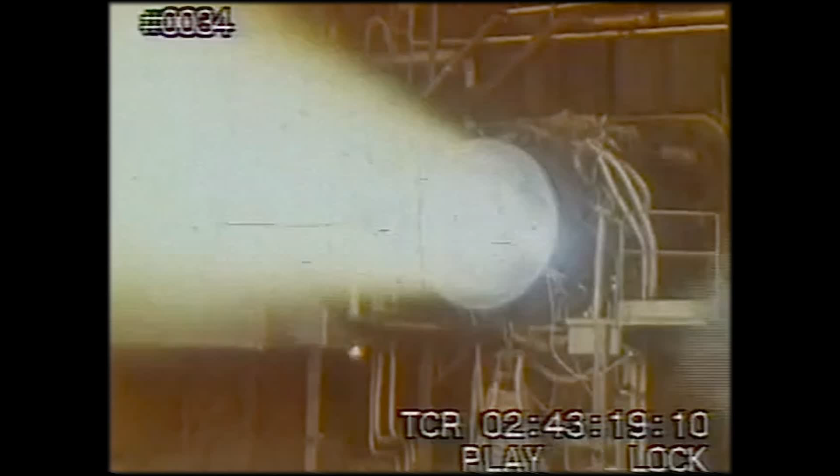Got rocket engines, you've got money. So get yourself on down to your nearest ex-Soviet state while stocks last. RD-170s, NK-33s, we know how to build them and you don't. We've got warehouses of these things, but better be quick, the Americans are snapping them up as we speak.

Want to hire our engineers to design your own engine? We can do that too. Better hurry before Iran get hold of them.

Or maybe you're a country of taste. We've got hydrogen LOX engines just for you. The Brits are eyeing those up for their spaceplane, which they're totally going to build.

Forget engines, how about an entire Buran orbiter? We already have some rich guy in Australia buying one, and we can make it happen for you too.

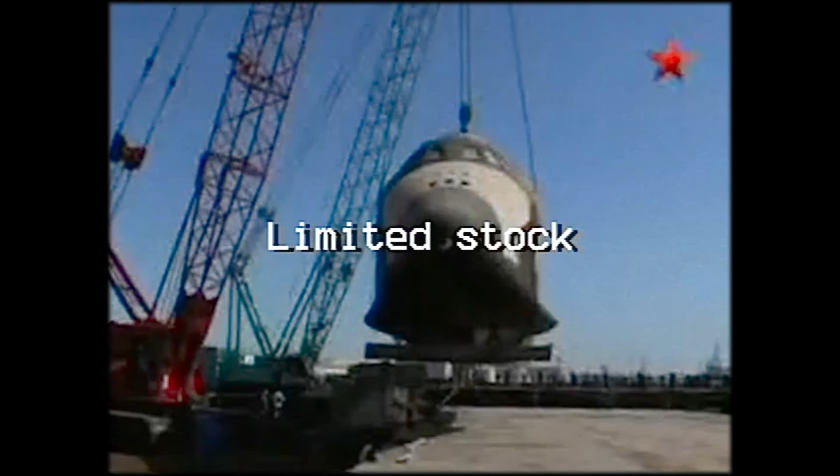Suitcase nukes? No, we don't sell those. I mean, they don't exist. Probably. Or a trip to Mir.

Not ambitious enough? These Americans are already lining up to buy Mir. If you don't want to go there, why not bring it to your doorstep?

We've already sold one engineering mock-up to Tommy Bartlett's Exploratory in Wisconsin. Okay, and we can sell one to you too.

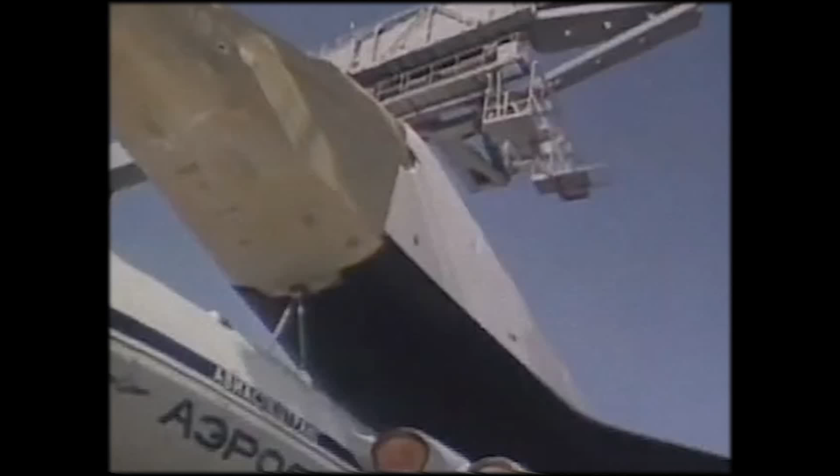The Europeans are eyeing up our VMT Atlant for their spaceplane, which they are totally going to build. Hell, have two of them. You buy one, you get one free.

Please buy them, we really need the money. If we can't sell it, we'll rent it to you. Want to rent Baikonur? Be our guest. You can borrow a Soyuz or a Proton while you're there.

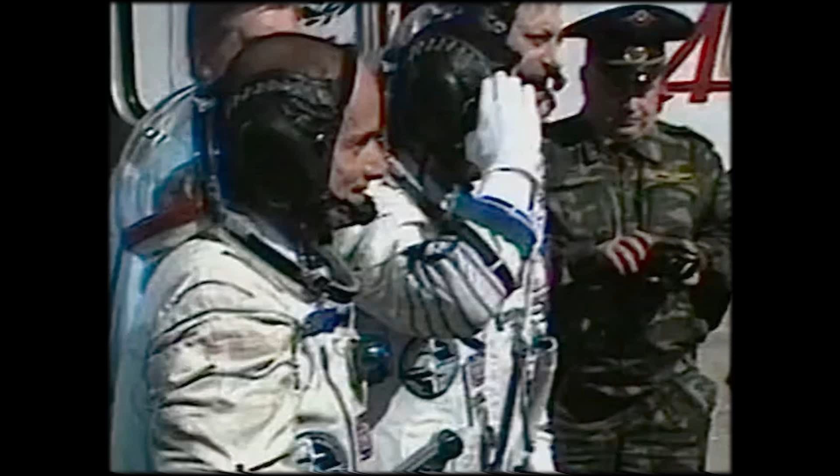Want to use it to be the first space tourist? Be our guests. We're already renting out our nuclear icebreakers to tourists. We can sure as hell take you to space too.

Need to lift and shift something big? Well, this girl is for hire!

Some people on the internet got something slightly wrong, so I've made an hour-long video about it.

Back in 2020, a test firing of a SpaceX Raptor engine exceeded 300 bar of chamber pressure, which may have been a record at the time. It's difficult to know for sure. Chamber pressure isn't really something that was scrutinised in the public eye until quite recently.

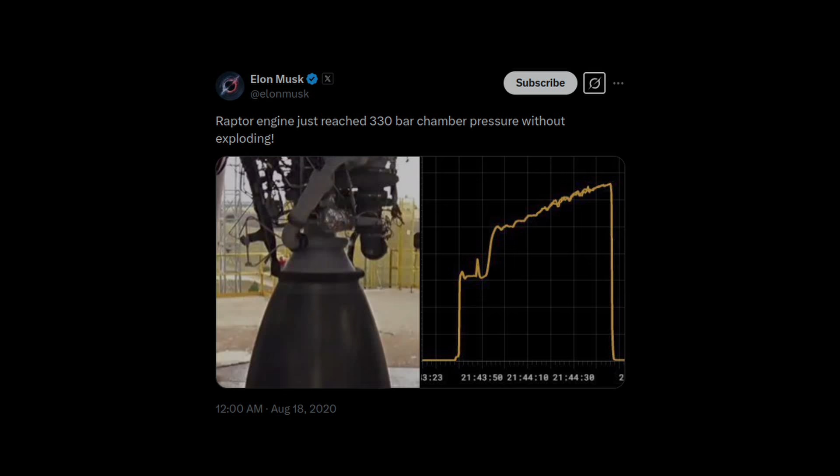Quite a few news sources stated the previous record was held by a mythical and absolutely revolutionary engine, the late Soviet RD-701. Even Wikipedia still states that to this day. Problem is, on further reading, it's clear without a shadow of doubt that the RD-701 never existed.

The first rule of my channel is to make videos about things that are interesting. I also have a kind of hidden rule to only evaluate things that were actually built. But the RD-701 is interesting enough for me to break the second rule. So this video will be a little different to normal.

I will be discussing multiple things that were built that were closely related to the RD-701. And I will discuss how the RD-701 would have worked and why it would have been really difficult to actually use in an orbital spacecraft.

I will try and let you come to your own conclusions on whether it could have given the world a cheaper, safer, and more practical space shuttle. For that, we need a lot of context. This video is a story.

If you're here to just learn about how a sequential tripropellant engine works, just skip to the relevant chapter.

Now, I want to be clear. Nothing here is a criticism of anyone who mentioned the RD-701 in a video or an article or anything else. It took me a while to realise it was never actually built, and it was only when I translated some journal papers originally written in Russian that I figured it out. It's just not possible to expect anyone mentioning it in passing as part of a greater video to have gone through all the research I did for this one.

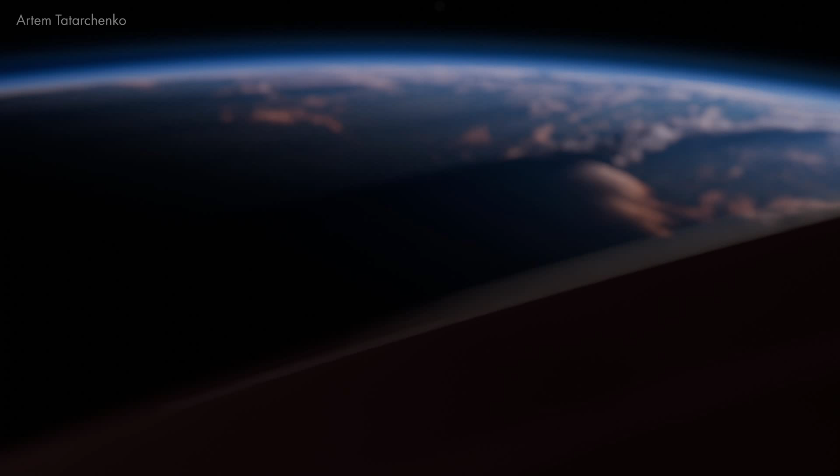Finally, this story does tie into modern-day Russia, particularly the destruction of a prominent related piece of equipment in the ongoing conflict in Ukraine. I don't want to discuss that again. I've made my feelings on that unambiguously clear before. If you really want to hear it, skip to this point in the linked video.

Whoa! The Soviets designed a tripropellant rocket. It must have been fueled by antimatter and cyanide or something, right? Well, not really. The RD-701 was designed to run on liquid hydrogen, kerosene, and liquid oxygen.

For those who've seen the video I made about a year ago about a very different tripropellant engine, that's going to be a real disappointment. While that engine was a nightmare to operate from a chemical hazard perspective, the RD-701 would have been a nightmare from a mechanical and materials engineering perspective.

To understand how it was to work, we first need to revisit an old concept: specific impulse. Shortened to ISP, specific impulse is one of the most important defining parameters for a rocket engine. It has a particularly interesting property, which is if you try and explain it on the internet, you'll always get angry comments telling you you've got something wrong. There's a reason for that. I'll get to it at the end of this chapter, and hopefully I'll make everyone angry.

For a given propellant choice, specific impulse can be characterized using one measurement alone: the velocity of the exhaust. Imagine two equivalent rockets. Both eject the same mass through the nozzle, but rocket A ejects it at a higher rearward velocity than rocket B. Rocket A will travel faster. Rocket A has a higher specific impulse.

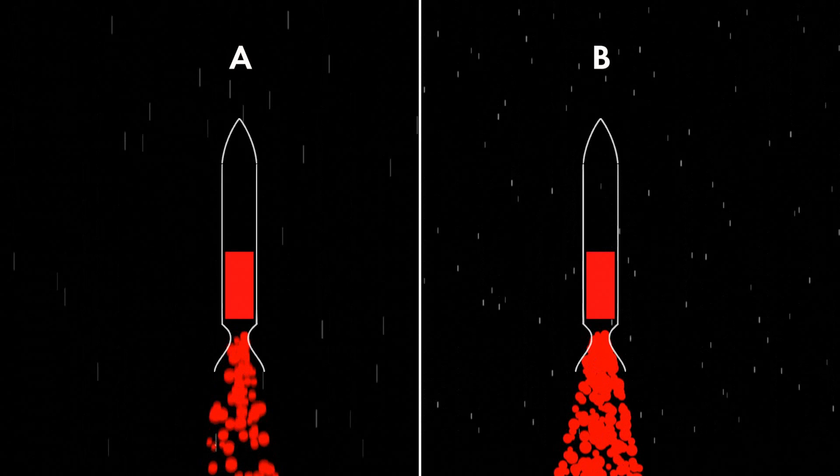Okay, how can we make the exhaust speed higher? The most obvious approach is to use lower density propellants. If the exhaust gases have a lower molecular mass, they'll be accelerated to a higher speed, pushing the rocket forward with a higher thrust. At the extreme low density end are propellants that incorporate hydrogen. Hydrogen and liquid oxygen is the practical example and the propellant of choice for systems where a high ISP is a necessity. We can actually do slightly better than this, but beyond this point are spoilers from our previous tripropellant rocket video.

If you don't want to have that horror concoction revealed here, just skip forward 1 minute. Okay, so that engine used mainly hydrogen, but accelerated it by burning lithium and fluorine at extremely high temperatures to increase the exhaust speed even more. Crucially, those are all elements with low atomic masses, giving a low-density exhaust and delivering a record-high ISP.

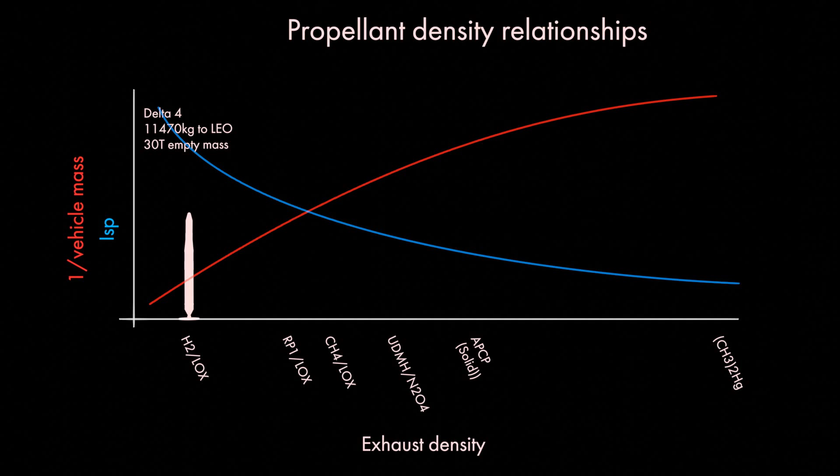We have a trade-off. And that is why the Delta Medium and its brother the Delta IV Heavy are the only rockets ever built that can get to orbit using only hydrogen and oxygen. Ever wonder why a Delta IV Medium can carry less than half the payload to low Earth orbit, yet is larger than a Falcon 9? That's why. Of course, this isn't a criticism of the Delta IV, it was a workhorse. But in most cases, using hydrogen-based propellants alone to get to orbit is not practical.

So a smaller rocket is a lighter rocket. Let's revisit the other end of that scale. That tripropellant I mentioned in the previous video is probably not the most chemically horrifying rocket engine ever built. It's definitely not the most horrifying one ever conceived.

That honour probably goes to the dimethyl mercury rocket proposal. If you didn't immediately recoil in horror, a tank of dimethyl mercury would be enough to fatally poison every person in North America just by coming into contact with it. That was never built. But back in the 1960s, US researchers did inject mercury into a combustion chamber, giving us the most dense propellant ever used in practice, and presumably creating an environmental disaster in the process.

So finally, we see why kerosene and methane are so common as rocket fuels. They're trade-offs between rocket mass and specific impulse. But for those willing to put in the extra effort, it is possible to have the best of both worlds.

Using a higher density propellant for the larger first stage allows us to build something that isn't absolutely huge, but still has the high thrust needed to get off Earth without building giant heavy engines. The second stage of a rocket is smaller, so it's easier to build a hydrogen-fueled second stage that is actually practical. And if we burn hydrogen when we're already travelling at a significant proportion of orbital speed, that means more of that high ISP fuel is ultimately used to deliver energy to the payload and not to the fuel itself.

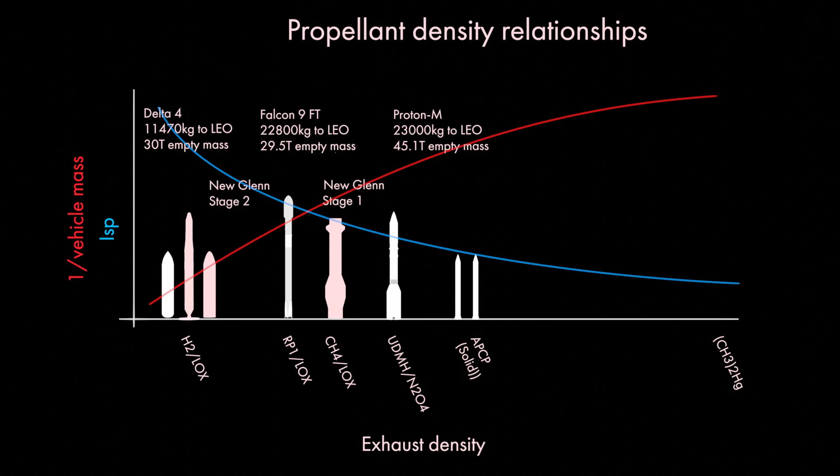This is why the shuttle and Buran used boosters to get as much hydrogen as high and as fast as possible. It's why the hydrogen-fueled Centaur upper stage has been used, well, everywhere. And it's why New Glenn uses a hydrogen-fueled upper stage. A smaller first stage to ultimately use a high ISP fuel to reach orbit. The RD-701 would have combined all of these advantages into a single engine.

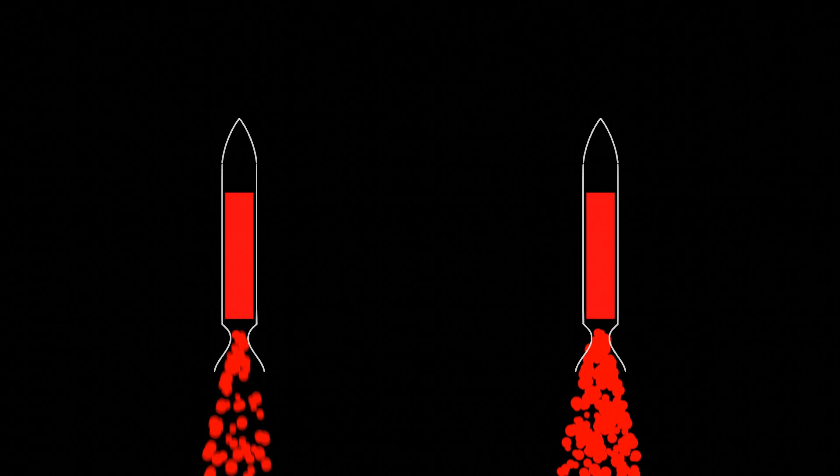And just to make everyone, both American and non-American, mad before we move on, the reason specific impulse is often misunderstood is because it's usually expressed in a weird unit. Impulse is the change in momentum of a system. Specific refers to per unit of propellant consumed. So, per every kilogram of propellant consumed, the momentum of the rocket changes by a given amount. That amount is the specific impulse.

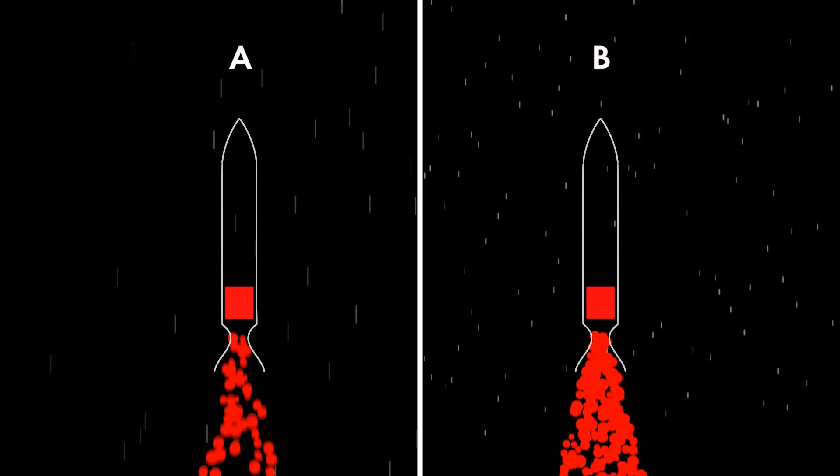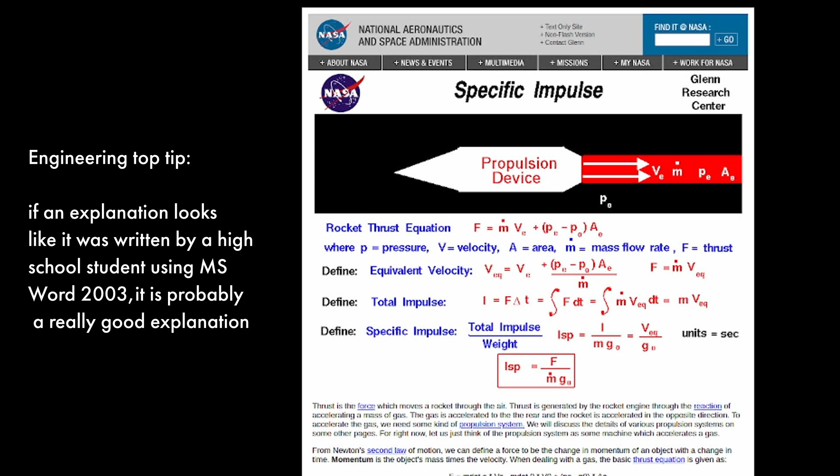So, expressing specific impulse in meters per second, or newton seconds per kilogram, is intuitive and really easy to understand. Unfortunately, America disagrees, because historically Americans have been allergic to using SI units. We end up with specific impulse being commonly expressed in seconds. This is because doing so works in both US standard and SI units.

I tried to extend an olive branch in the last video by showing seconds as an okay unit to work with, but people got mad at me. So, there you go. Use whatever units you want. And for all the smug Europeans like me declaring, well, NASA use metric anyway - no, they don't. Why do people always say that?

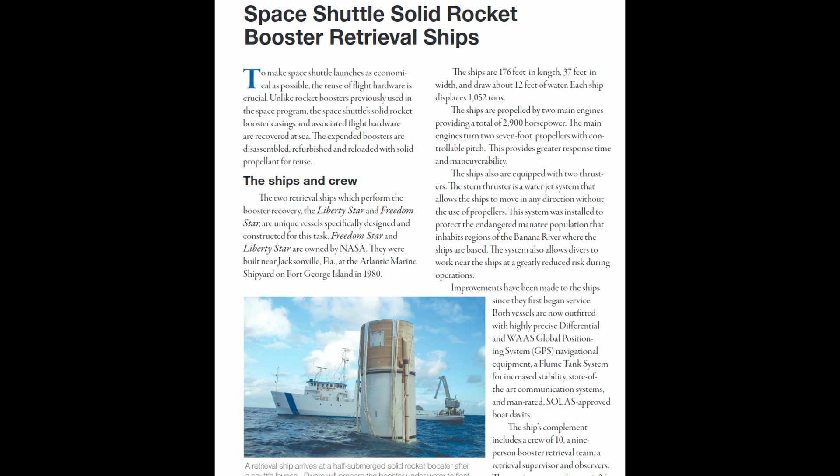Here are some NASA papers I've used in previous videos, all in US units. In fact, the Apollo guidance computer had to use a fraction of its unbelievably precious memory to convert its outputs to US standard units, as the astronauts preferred it that way. Alright, I know people are still going to crucify me for that.

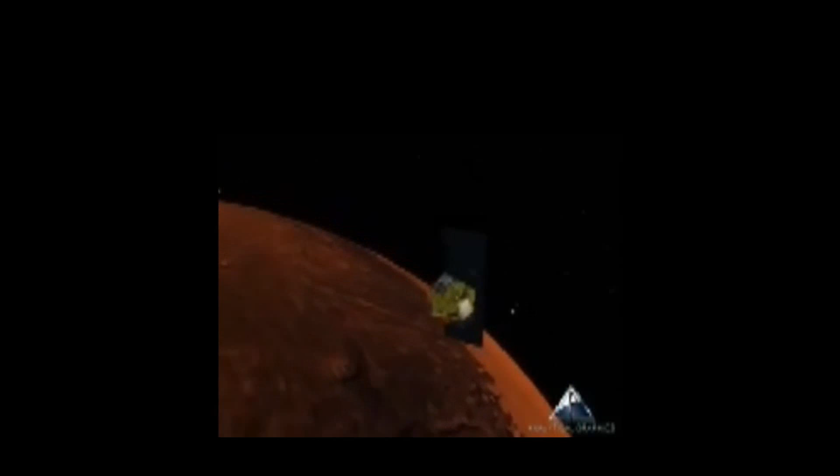In reality, NASA is a huge organisation. Some departments use SI units, especially for engineering calculations. Some use American standard units, especially for the likes of public outreach. And that's varied over time as well. You can see them using SI as a secondary unit in one of the papers I showed. As with the aerospace industry worldwide, they use a mix of units, which is, no further comment.

And indeed, chamber pressure is often quoted in bar, which is a non-SI unit. I will be using that throughout this video, by the way, just to keep with convention. So, there you go. There are indeed 3 types of countries: those that use metric units, those who've been to the moon, and Liberia and Myanmar, for some reason.

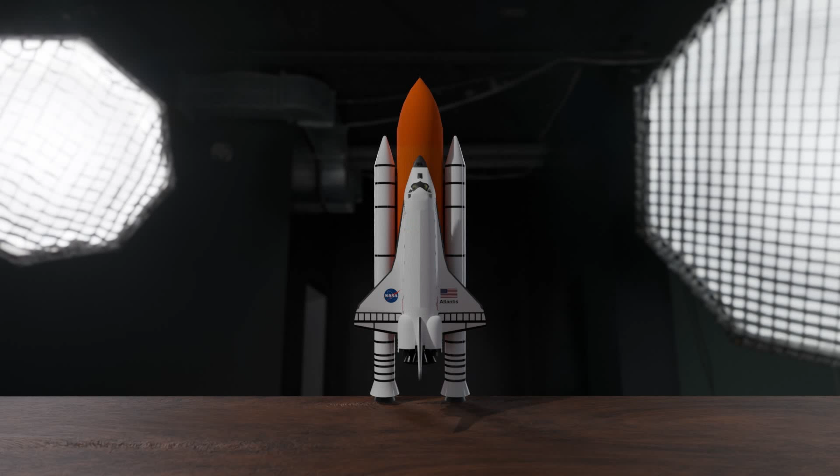With all that in mind, let's build a cheap orbital spaceplane. What better way to start off than by building an extremely expensive orbital spaceplane? Here is the shuttle. That's the one most of us are familiar with, but I'm going to replace it with Buran, for reasons that will become apparent.

Now, I did an entire video on Buran. I tried to stay kind of neutral in that video regarding whether or not I thought Buran was a good idea. It was a hell of a technical achievement, but let's be honest, building it was a pretty terrible piece of decision-making on the part of the Soviets. Exactly as with the shuttle, if used to launch crew, Buran would have been complete overkill, highly complex and failure-prone. If used to launch cargo, well, they already had a rocket for that.

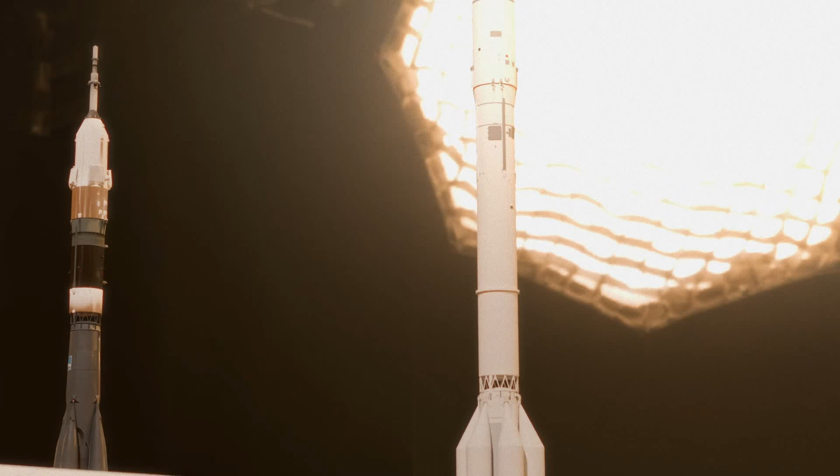That said, to have ever had a shot at building what we're about to sketch out, they kind of had to build Buran first. So how about focusing on just getting the crews to orbit and back? Let's aim for that new Mir space station. Without a requirement for a large cargo bay, we can shrink our orbiter right down, and that means less payload mass, so we can shrink the propellant tanks too.

Let's consider what's in those propellant tanks. The side boosters use kerosene and liquid oxygen and essentially constitute a first stage. They provide a high thrust yet are relatively small. The core tank uses hydrogen and liquid oxygen. This was absolutely necessary to reach orbit for both Buran and the shuttle. No other practical propellant had the ISP necessary to get such a large payload to orbit.

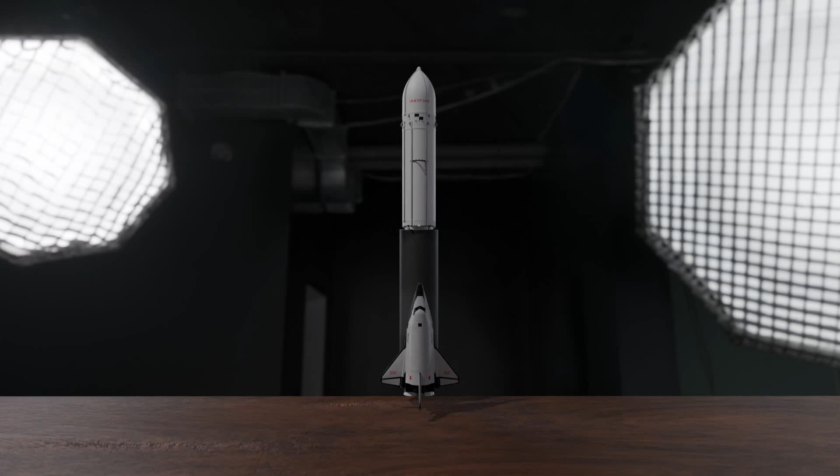Okay, let's simplify things. We'll stack the two stages sequentially and burn the kerosene followed by the hydrogen. The orbiter could sit on top like the concepts we've seen for Dyna-Soar and Dream Chaser. But we can do better than that. This system needs to be cheap, and as is, we're throwing away all the expensive engines on every launch. So put the engines on the orbiter itself, just like the shuttle.

But where do we mount the orbiter now? The only way this could work practically would be to mount the orbiter like this. And that's a problem, because we can no longer jettison the first stage. So don't. Incorporate all the kerosene and most of the hydrogen and liquid oxygen into a single stage.

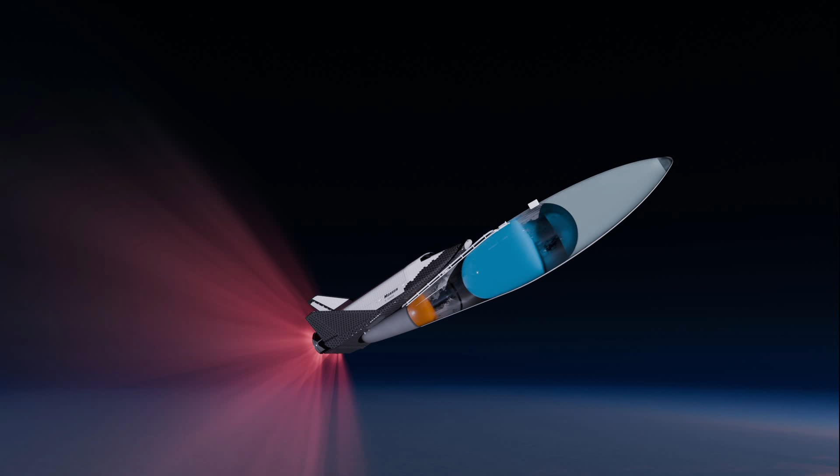But carrying that large tri-propellant stage so high represents a significant mass penalty. So we need to reduce the mass of our orbiter as much as possible. Instead of equipping it with separate kerosene and hydrogen main engines, could we somehow combine the engines into one? A single engine that first burns the kerosene and then switches to hydrogen. That engine would have been the RD-701.

So, a different type of tri-propellant entirely to the one in my previous video on the matter. That one burned both fuels at the same time. The RD-701 would do so sequentially, but it's a bit more complex than that. During the kerosene phase, or mode 1, a small amount of hydrogen would actually be added to the mix. And during the hydrogen phase, or mode 2, a small amount of kerosene would be added. The RD-701 would have therefore been a mostly sequential tri-propellant engine.

We'll discuss why later. But this still wouldn't work. Even combining the highly efficient existing hydrogen and kerosene burning engines available to the Soviets wouldn't give us the speed needed to reach orbit. We need a bit of a boost. And the Soviets had just the thing for that.

Every now and then, we humans build something that breaks a record. Something bigger, faster, or stronger than anything of its type. Once in a blue moon, just the right group of humans, for whatever reason, manage to get together and build something that doesn't just break records. In a single step, it exceeds them by such a margin, it creates an entirely new class of thing all by itself. There were cargo planes. There were strategic airlifters. And then, there was the Antonov AN-225.

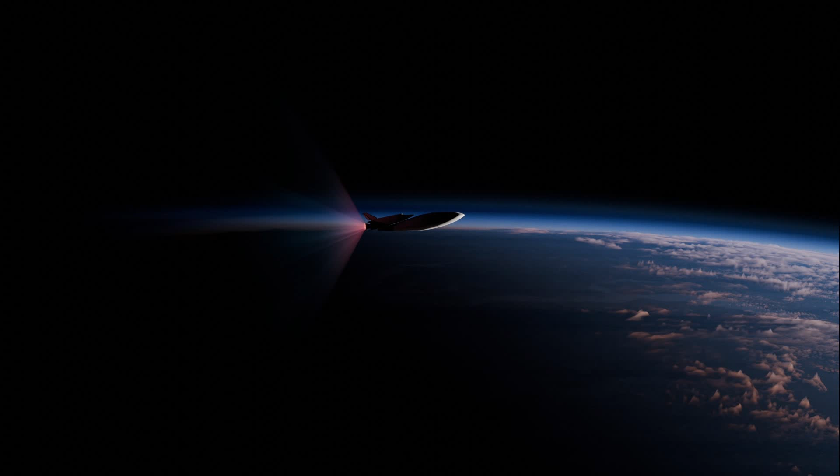You can say what you want about the Soviet space program, but they were always at their best when they stopped messing about and trying to one-up the Americans and actually did their own thing. The AN-225 was about as far from messing about as it gets. Originally built to carry the Buran orbiter, it was the largest fixed-wing aircraft ever built by every meaningful metric.

How large? The American shuttle weighed 30 tons more than Buran, and the Americans chose to modify two Boeing 747s, the largest aircraft available in the West, to carry their heavier orbiter. If you could break up one of the shuttle carriers into little pieces, the AN-225 could easily carry its entire mass internally. In fact, add the shuttle too. And that's not just a paper exercise, it actually flew with a heavier payload than that on at least one occasion. The system as a whole was to be called MAKS.

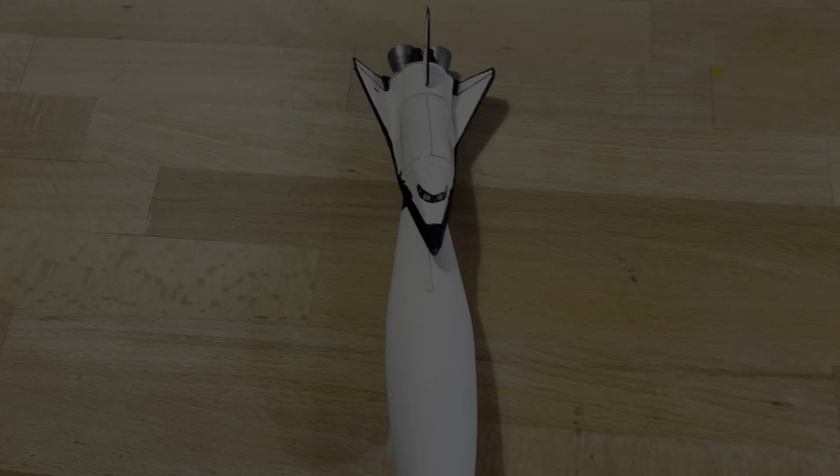That stands for Multipurpose Aerospace System. Could the AN-225 have carried MAKS? Does the AN-225 have a potential competitor in existence right now? We'll come back to both of those questions soon.

So, we arrive at the in-detail description of the actual topic of this video. How would the RD-701 have worked? I'm going to be honest, I spent a lot of time pondering how the heck to even begin with this one. So let's begin where the Soviets left off.

Thanks to the Buran program, they had two of the best rocket engines on Earth. The RD-0120 was a fuel-rich closed-cycle hydrogen liquid oxygen main engine. 4 of them were used on Buran. I've previously referred to them as copies of the Space Shuttle main engines. That's not really true. The Soviets most certainly did copy the materials and basic architecture from publicly available NASA data, but they also made fundamental changes which we'll discuss.

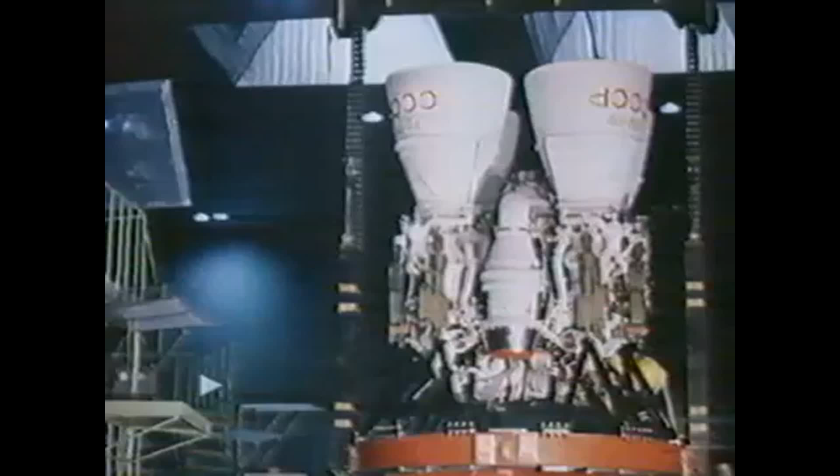Second was the RD-170. To this day, this is the most powerful liquid engine and one of the highest ISP kerosene liquid oxygen first-stage engines ever built. That's because it uses an oxidizer-rich closed cycle. As we build up our model on screen, I hope viewers who are unfamiliar with that terminology will begin to understand why that was a spectacular achievement.

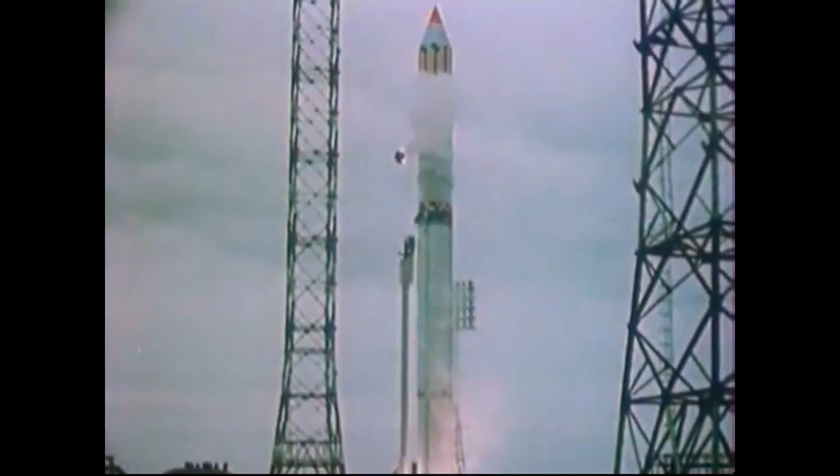The Soviets copied many aspects of the shuttle main engines, so why didn't the Americans copy the RD-170? Because they had no idea it existed. They only learned of it when the Soviet Union collapsed. It's a hell of a story, and I discussed it in my video on Buran. Not to dwell on the point too long, but a joint paper from Energomash and Pratt & Whitney written shortly after the West discovered the RD-170 states the oxidizer-rich preburner and turbopump were the enabling technology for the RD-701.

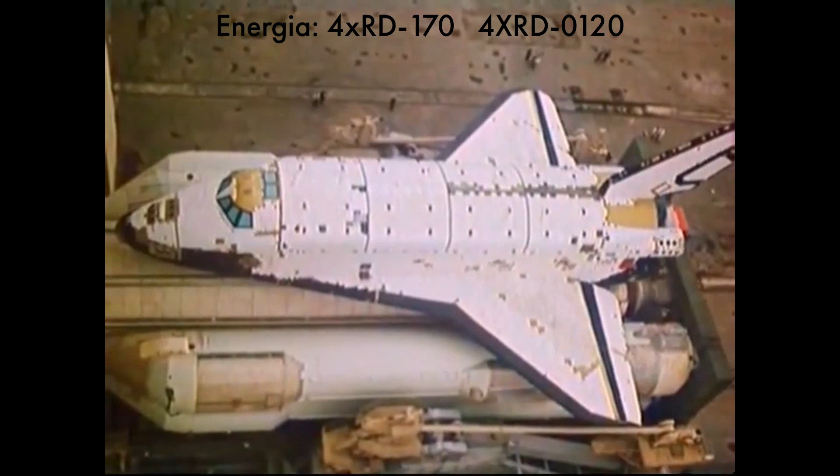In fact, that paper's interesting. We are not too far from a universe where the RD-701 was developed jointly by the Russians and the Americans. It's probably fair to say the Soviets had done the difficult part already to bring this engine into reality. Well, the difficult part with respect to engineering anyway. Politics and economics are a whole different ballgame.

I don't really like ball games, except for cricket. So, let's discuss something almost as exciting and complex as a 5-day test match.

The RD-170 and RS-25 shuttle main engines are something I've discussed in depth before. If you want the details, the links are on screen now with timestamps to relevant chapters. This chapter is basically an amalgamation of everything I've discussed on rocket engine architectures before. For those happy to proceed, let's do a quick recap.

The RD-170 burned a relatively small amount of fuel with liquid oxygen in 2 preburners. This created a hot oxygen-rich exhaust which drove a turbine. For those that aren't aware, this is the oxygen-rich part. Designing a turbine that can survive that atmosphere was thought to be practically impossible in the West. The turbine drove a fuel pump which sent most of the fuel around the nozzle and combustion chamber to cool it, with the remainder sent to the preburner. On the same shaft was the oxygen pump which supplied all of the incoming liquid oxygen to the preburners.

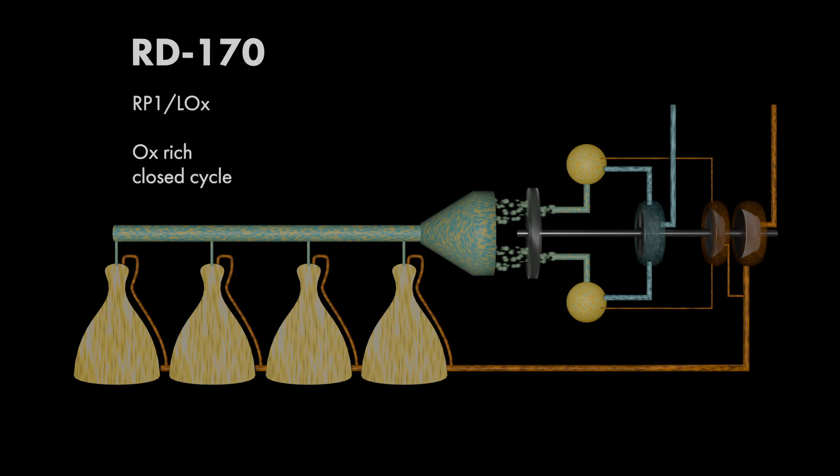The hot oxygen-rich preburner exhaust was sent directly to the injectors in the main combustion chamber, where it mixed with the fuel, allowing combustion and therefore providing thrust. That thrust was actually through 4 separate chambers, but we're going to apply a little hindsight now.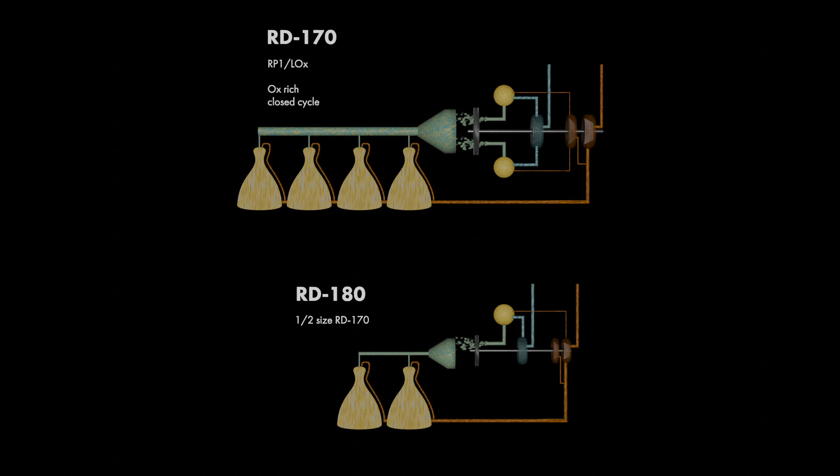When most of the literature for the RD-701 was written, the Russians had not yet developed the RD-180, which is a half-sized variant of the RD-170. And side note, the naming terminology is confusing. I hope my on-screen guide is helping. Anyway, we're going to only consider that half-sized variant from now on, as it was similar in scale to the proposed RD-701.

Okay, now let's look at the RD-0120. Unlike the shuttle's RS-25s, all the turbo machinery was on a single shaft, giving a simpler engine than those on the shuttle. How on earth this was viable, given the different density between liquid oxygen and hydrogen, I have no idea. But all the fuel and some of the oxidizer were fed into a pre-burner to give a fuel-rich exhaust.

The exhaust drove the turbine and was fed into the combustion chamber. The turbine drove the fuel pump, which sent most of the hydrogen directly to the combustion chamber, with some routed around the chamber and nozzle through ducts to provide regenerative cooling, before being burned in the chamber.

The first stage of the oxidizer pump sent most of the high-pressure oxygen to the combustion chamber. Some was boosted by the second stage and sent to the pre-burner. As was the case with the RD-170, all the fuel eventually ends up in the combustion chamber, giving a closed cycle.

So, how do we mash these two engines together to make an RD-701? Okay, let's take the RD-180 as a basis. You'll note the RD-180 has two combustion chambers but is a single engine. This was to combat combustion instability issues from using a large single chamber.

The RD-701 would have also used two chambers in the same manner. A derivative, the RD-704, was also proposed which would use a single chamber. That was even further from existing than the RD-701, so we need not consider it further.

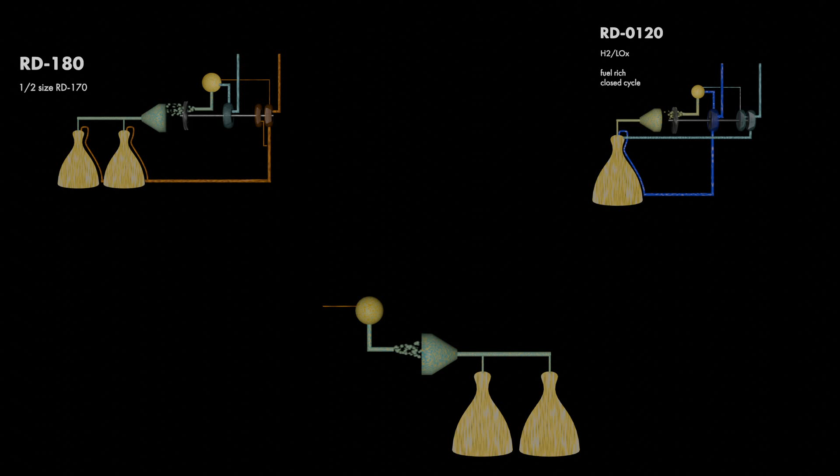We take a pre-burner from an RD-180 and pair it up with a half-sized LOX and kerosene turbine. Again, with hindsight, this would be, in reality, the turbine assembly from the relatively new RD-190, a quarter-scale derivative of the RD-170. Okay, let's connect the kerosene pumps to our turbine.

That is pumps plural. The first stage sends most of the fuel directly to the combustion chambers, and those chambers would operate at 300 bar, which is where that mythical number comes from. Some of the fuel flows into the second stage pump, which provides fuel to the pre-burner.

Incidentally, prior to the Raptor, that chamber pressure record was likely held by either the RD-180 or the 190. They both operate around 260 bar, but have likely exceeded it during testing.

Now, since the RD-701 was never built, we don't need to swoon over this fact too much, but the outlet of that second stage kerosene pump would have experienced the highest pressure anywhere in the system. About 940 bar. The oxygen pump would be on the same shaft, just as with the RD-180.

This would send all the liquid oxygen to the pre-burners. Again, pre-burners with an S, because it would also supply oxygen to the hydrogen pre-burner. And now we know why the engines would have to burn at least some kerosene throughout the flight. It was to keep the oxidizer pump running.

Okay, now it's time to move to the second mode and burn the hydrogen. Pratt & Whitney suggest a half-sized fuel pump from the shuttle main engines. I suppose a half-sized pump from the RD-0120 would do the job equally well. Let's stick with the Soviet/Russian design and take that.

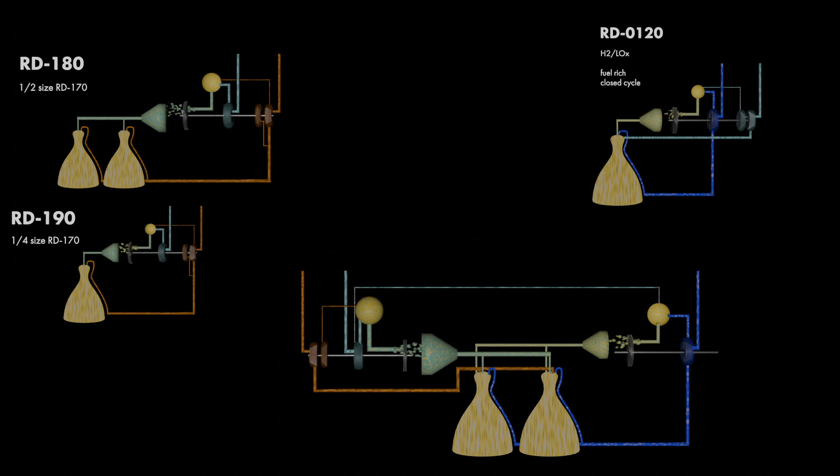In conjunction with the closed cycle, that means all the fuel ends up in the combustion chamber, improving efficiency further. And now we know why some hydrogen had to be burned during the kerosene phase of flight, to keep the regenerative cooling active.

So that completes the basic cycle. It's interesting to note the cycle itself doesn't change between the kerosene and hydrogen modes. Instead, the proportion of each fuel burned was changed, but the overall engine cycle would have been the same throughout the flight.

Now, the final components we need to discuss are the low-pressure pumps. Each of the three propellants would have a low-pressure turbopump driven by a fraction of its respective high-pressure fluid. That gives us a total of 5 turbopumps, 2 pre-burners, and 2 combustion chambers.

I haven't even touched on the complexities of balancing all the pressures in that system, monitoring it during flight, testing, and indeed starting the thing up. But something like the RS-25 is probably around the same level of mechanical complexity as the RD-701. And the Soviets definitively showed they could build highly complex engines.

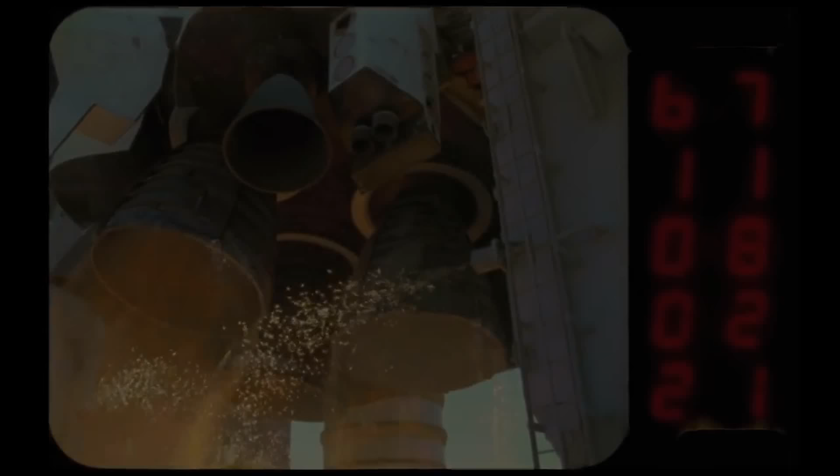On paper, the RD-701 works, and I have no doubt it would have been technically viable if actually built. But right now, we're looking at it as engineers looking at the RS-25 back in the 1970s. That looked perfect on paper. And it is as close to perfection as it gets in reality, speaking solely as an engineer.

But with 40 years of experience, we now know the RS-25 costs a fortune to build and reuse. I have no idea whether the RD-701 would have been equally, if not more, expensive.

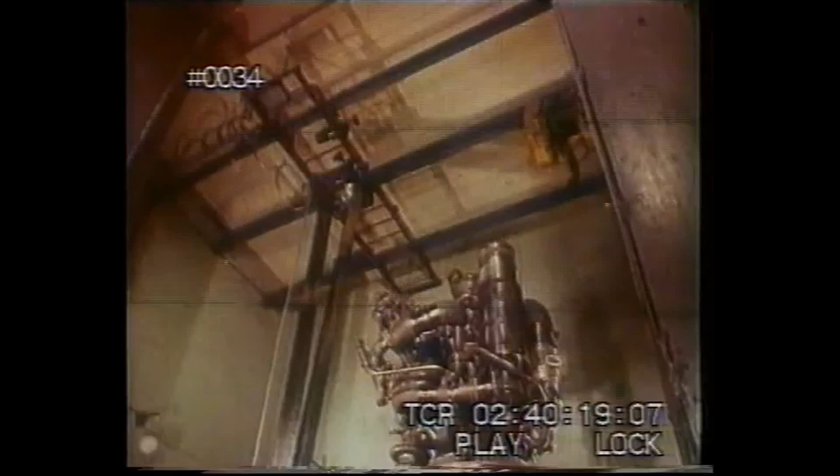I suppose a tantalising fact to end the chapter on is that when Pratt & Whitney engineers visited Russia in 1991 and viewed the RD-0120, they eventually invited the Russians over to the US. The RD-0120 had a number of design features such as milled cooling channels, the single shaft and the improved chamber geometry, which could feasibly have drastically reduced both construction and rework costs for a relatively small reduction in ISP compared to the RS-25s. Maybe the RD-701 could have actually been economically viable.

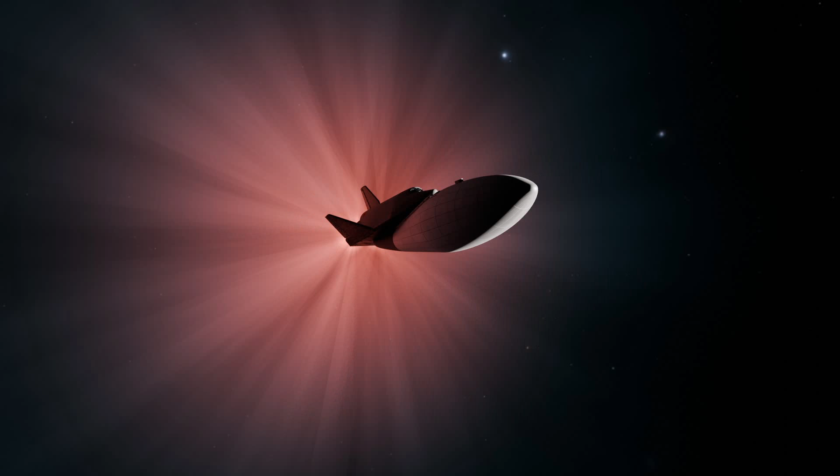Well, I suppose this is the disappointing chapter. This is where I conclusively demonstrate that the RD-701 was never actually built. On the plus side, the Russians did build a kerosene, hydrogen, oxygen tripropellant engine, but the paper that documents that also confirms that the RD-701 never existed.

NPO Energomash was formerly known as Design Bureau OKB 456 back in the Soviet days. Its chief designer was Valentin Glushko, one of the two prominent Soviet rocket engineering geniuses. The other was, of course, Sergei Korolev. They hated each other, by the way, but that's another story.

Back in 1968, Glushko founded the publication of recent proceedings from the Bureau, and this eventually became the annual proceedings of Energomash. Typical issues consist of several dozen technical papers and contain some of the more interesting aspects of Russian rocket development. Now, I tried my damn hardest to find copies of those proceedings from around 1988, which is when development of the RD-701 was underway.

This included searching the catalogue of the Russian State Library, looking through Energomash's archives via the Wayback Machine, blocked in the West now, unfortunately. Artem even tried emailing Energomash. The earliest issue I could get was the 18th proceedings, published in the year 2000. It's fair to say that things went a bit sideways in Russia during the 1990s, and unfortunately many documents were lost or simply never digitized. But what seemed like a dead end turned out to be a real stroke of luck.

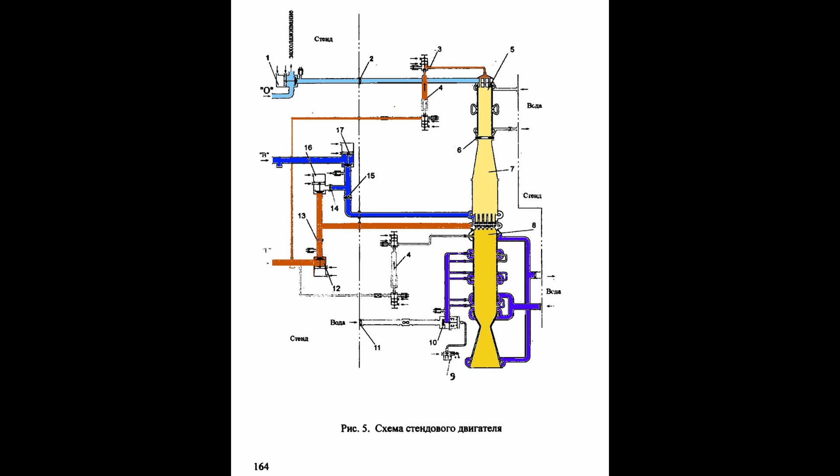You'll notice this is simpler than the proposed flow control for the RD-701, where throttle valves would only allow a small amount of hydrogen through in Mode 1. For this test, the hydrogen flow was at full rate throughout.

There was none of the complex turbo machinery present for an actual rocket engine here, and based on the thrust results, the scale of this article was only about 1.5% the scale of the RD-701. It produced around 60 kilonewtons of thrust in Mode 1 and about 30 kilonewtons in Mode 2.

By the way, that isn't exactly a small amount of thrust. The RD-701 was intended to output 4 meganewtons in Mode 1. For context, the F1 engines on the Saturn V output 6.9 meganewtons each. This high thrust requirement is the reason the chamber pressures would have to be so high.

The test engine was fired a total of 44 times with different hydrogen and kerosene mixtures tested, along with variations in the cooling jacket and the injectors. Many of the firings included a switch from Mode 1 to Mode 2, and the longest firing was for 100 seconds. The main goal of testing for efficient mixing and combustion of the three propellants was achieved.

The highest chamber pressure recorded during the test was 220 bar, which is surprisingly high for a first-pass engine test. And of course, the tests confirmed a single engine could be built which handled both the material requirements for an oxygen-rich turbine exhaust and cryogenic hydrogen fuel.

It stated that the planned next step would be to improve the mixing heads further and incorporate regenerative hydrogen cooling in a larger test engine. But it seems that despite the early success, the work never went any further.

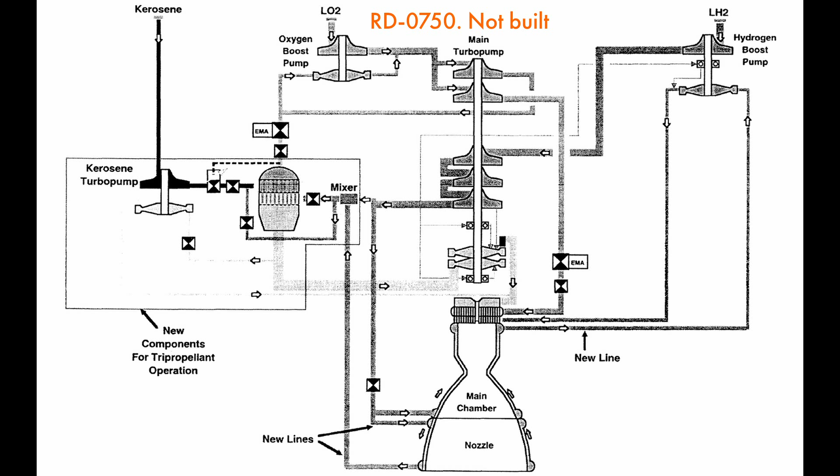On further reading though, that too was just a test stand article. It was much larger than the test engine we discussed, and it was apparently funded by NASA, though the source for that is a magazine entry, so I can't definitively confirm it.

Okay, so this tripropellant engine was designated as the RD-0750D. The RD-0750 would have been a simplified version of the RD-701. It'd use a common pre-burner for both fuels feeding into a single turbine. No idea how that'd work in reality, by the way.

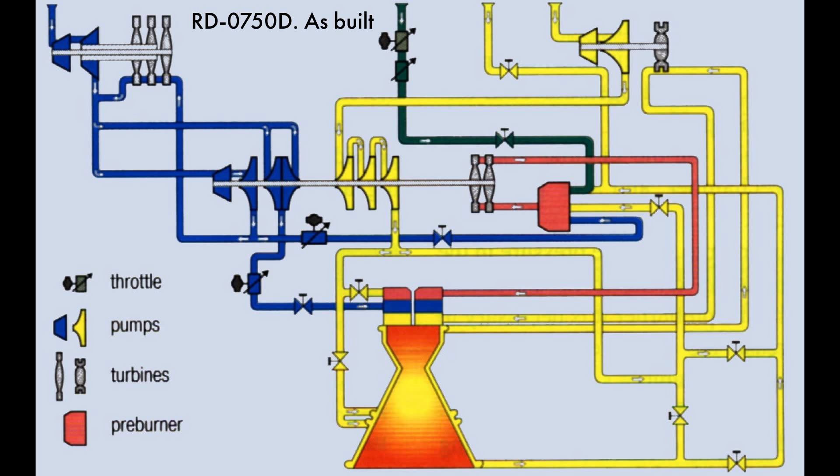The engine was test-fired in April of 1998, but after 4 seconds an automated system shut it down. Inspection revealed the pre-burner and turbine had essentially destroyed themselves. Some improvements were proposed based on this, but it's unclear whether a second test engine was ever built and fired.

So there you go. There was actually a second tripropellant engine built in Russia. It was much simpler. It was essentially an RD-0120 with a few bits and pieces bolted onto it. Had it been finalised, it would not perform as well as the RD-701, which had a dual shaft and dual pre-burners, but it did apparently exist to some extent. Oh, and also it didn't work.

Crucially, the overall theme of this video remains true. The RD-701 never existed. But let's go back to that 2000 paper regarding its demonstrator. The paper even puts dampeners on a couple of other myths.

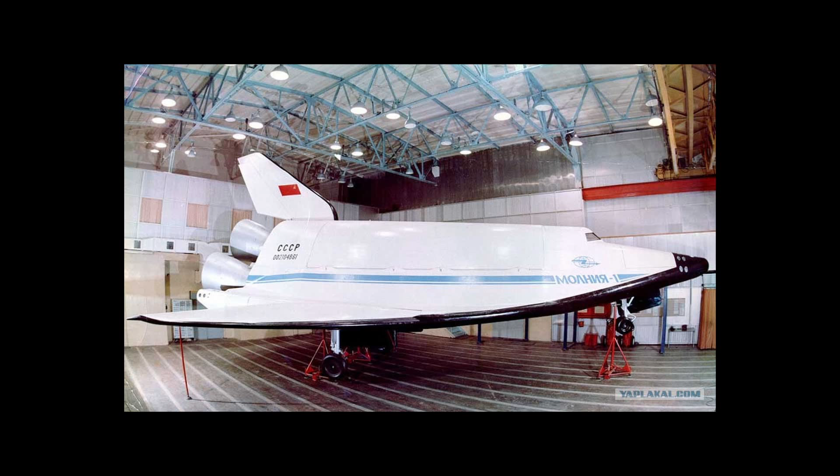Now, the other argument I'd anticipate is something along the lines of: the Soviets or Russians would never reveal something this clever to the world. They must have built the RD-701 and kept it secret.

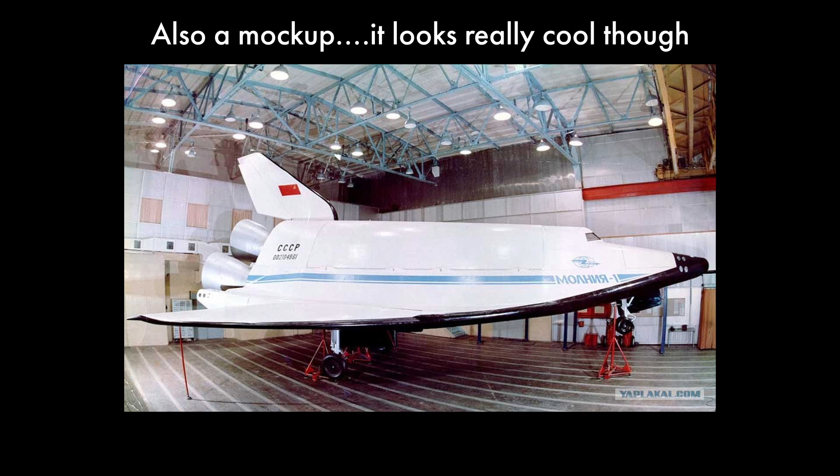Really? Ignoring the fact that they published their work on the concept to date in 1993 in conjunction with US engineers at Pratt & Whitney, let's go back to my intro. Yes, I presented it in a daft way and it was a lot of fun to make.

But every example of hardware I presented there was a true story. When the Soviet Union fell, the member states couldn't sell their IP and hardware to the West fast enough, and the West eagerly bought it all up. To theorise there was some kind of super secret engine which actually wasn't secret but was still built anyway would just be delusional bad story writing.

For anyone that remains unconvinced, it's impossible to prove something never existed. But I have provided evidence that it didn't, beyond all reasonable doubt. If that doesn't convince you, nothing will.

Moving forward though, the bench tests were successful. The concept of the kerosene, hydrogen, oxygen tripropellant is not just fascinating, but still in 2025, it's potentially revolutionary to spaceflight. It still exists on paper, just waiting to be dragged into reality.

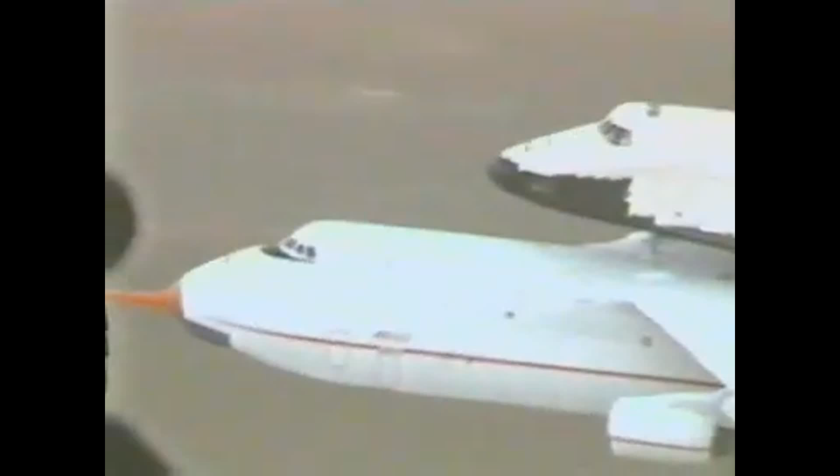When I started research for this video about a year ago, I initially believed there was only one major technical obstacle to MAKS, and that was the air launch aspect. We now know there were two, the other being the engine itself. So let's take a chapter away from the engine to ask the question: could the AN-225 have launched MAKS?

I'll cut to the chase. I think it could, but it wouldn't be easy. I'm also extremely biased because I loved the AN-225.

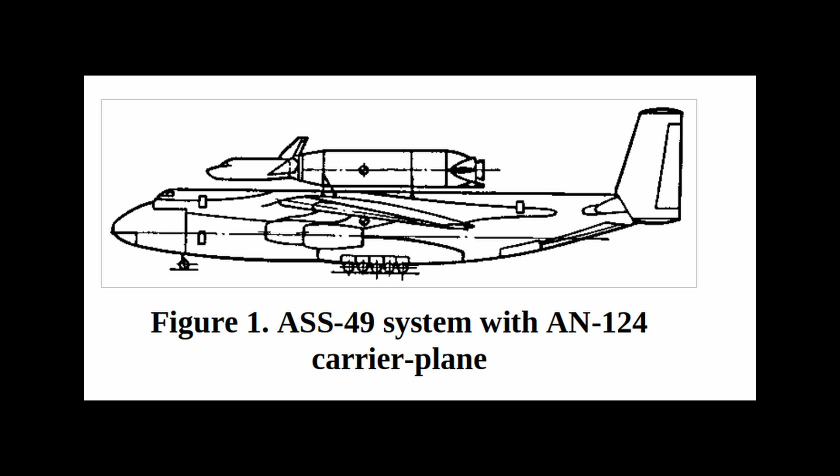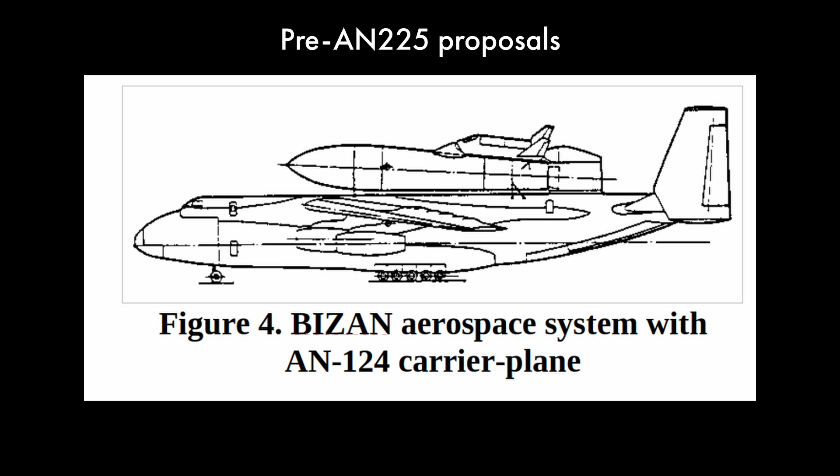Let's start with the most obvious requirement: payload mass. Though the AN-225 was designed to transport the Buran orbiter and Energia components, it's rarely mentioned that it was actually designed from the start as an airborne launch platform. NPO initially proposed a 170-ton vehicle to be launched horizontally from the AN-225, but the mass was later revised upward to 225 tons. Apparently that's where the 225 in AN-225 comes from.

MAKS was conceived shortly after the breakup of the Soviet Union and was the next revision of this launch system. The launch mass for MAKS would be 275 tons.

Now, we're going to get to what 'rated' actually means in a second, but the maximum rated payload for the AN-225 was 250 tons. And it did exceed this on one occasion during a record-breaking flight, which saw it carry a 253.8-ton payload consisting of 5 T-72 tanks.

So we know the AN-225 could fly carrying just over 250 tons internally with relative ease. In fact, one test flight carried a 250-ton internal payload at 763 km per hour. It was designed to carry 225 tons externally. Could it manage 275 externally?

There are many factors to consider here, but we'll just cover the two main ones and come back to some others at the end of this chapter.

Considering payload mass alone, the 250-ton rating would be based on structural loading. Exactly how and where that load was applied to the fuselage would be limited to specific cases, but I can't imagine re-rating the entire structure to carry an extra 25 tons would be too much of a challenge.

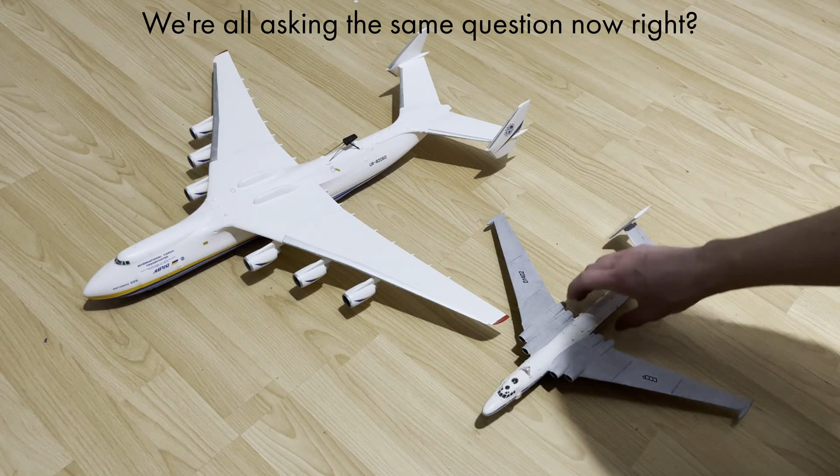For an extreme example of relaxing ratings to get a job done, we only need to look at the AN225's predecessor, the VMT Atlant. That required a 3.5 kilometer runway and really was operating at its limit when carrying the heaviest design payload, a stripped-down Buran orbiter. But it flew some 150 ferry flights successfully. It even managed a successful landing while carrying that worst-case payload, after a double engine failure on the same wing during final approach, though I am certain some heroics on the part of the crew were to play there.

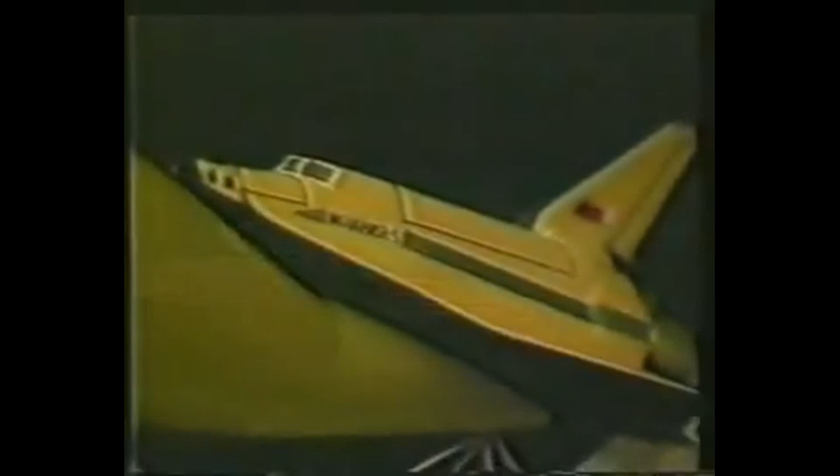Those watching the screen right now are probably wondering why I've gone to the trouble of building a model and chroma keying it. Well, there are a few reasons. First of all, it's fun and cool. Secondly, for this particular video, I wanted to improve on this really badly green-screened Buran orbiter and AN225 from an original Soviet informational video. There's a deeper reason I sometimes make these models when I have access to Artem's excellent 3D modelling, and yeah, I can do some 3D modelling myself too.

First of all, it's not actually necessarily easier to make a digital model. This may be surprising, but those animations take ages to make. But more fundamentally, when I make a video, I always try and put my hands on something related to the main topic. That can involve a museum visit, buying things on eBay, or a physical model.

The AN225 here is from a kit. I had to 3D print the orbiter and the tank - I don't think anyone sells a model of those. I printed the propellant tank first, and as the print began, I stopped and discarded it. The scale was clearly wrong - that tiny little diameter was obviously too small. I'd messed up the scaling, I thought. So I got the calipers out and measured it, and realised with almost a sense of dread, my scaling wasn't off. The propellant tank wasn't too small - it was just dwarfed by the AN225.

I'd never got that sense of scale from the on-screen 3D models, and I can't communicate it to you through your screen. No doubt the only way I could have ever appreciated the scale of this thing would have been to see the AN225 in person.

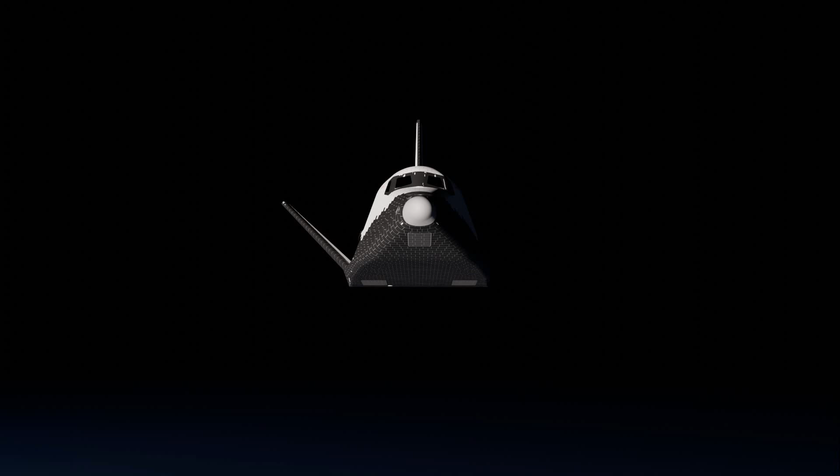Now, the thought of launching this thing makes me uncomfortable. The thought of landing 275 tons of hydrogen, kerosene and liquid oxygen on the back of an aircraft originally rated to carry 250 tons of less volatile stuff is a solid no from me. And Antonov agreed. The AN-225 was therefore to be fitted with vent valves and pipes which should sequentially vent each propellant to atmosphere via the tail in the case of an issue.

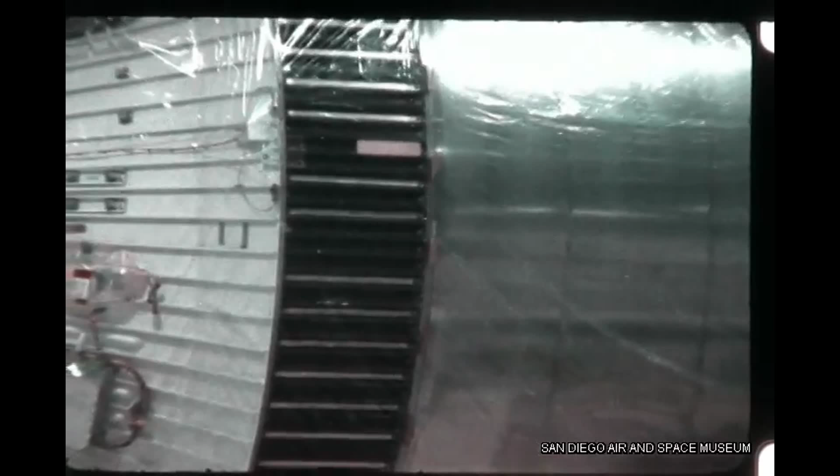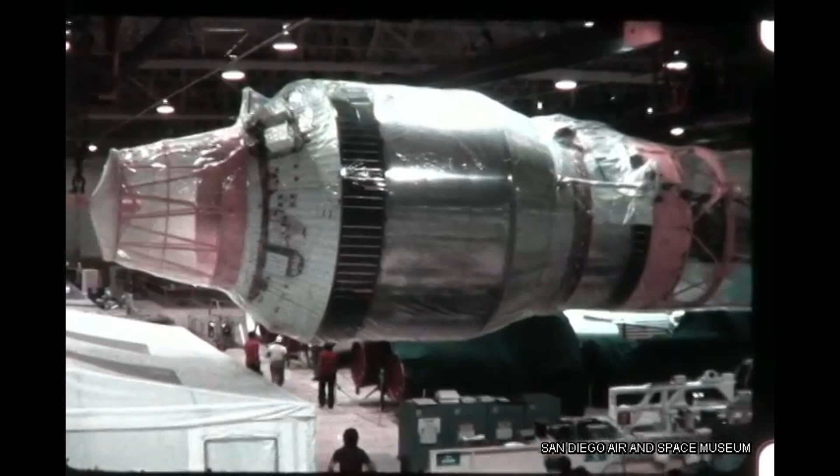Amazingly, there is a precedent for something arguably even more sketchy than this, and it very nearly actually flew. It's the space shuttle. Remember the hydrogen-fueled Centaur upper stages I mentioned at the start of this video? That was due to fly in the cargo bay of the shuttle to launch the Galileo probe to Jupiter. But then the Challenger disaster happened, and NASA re-evaluated the idea of flying several tons of liquid hydrogen and oxygen in the cargo bay of a crewed orbiter with no launch escape system.

But the Centaur would have also been connected to external vents used to dump the propellants in the case an emergency abort was performed. Apparently, the astronauts were not thrilled with this idea and feared the jettisoned hydrogen would ignite.

But back to MAKS. Most animations show it igniting its engines before separation. This was the cause of a particular heated debate between Antonov and Molniya. On one hand, igniting the engines before separating would allow any issues to be diagnosed and the launch aborted if necessary. On the other, even with them angled away from the aircraft, that is a lot of radiant heat.

Unsurprisingly, Antonov, arguably the best aircraft designers of all time, were correct. They mounted a test section of fuselage the correct distance from a test engine and observed it melt within seconds.

So, I think if MAKS ever saw daylight, it would have separated from the carrier and then ignited. Not only would that reduce the risk of destroying the carrier aircraft if an engine failed catastrophically at startup, but it'd also mean no thermal shielding would be needed to be mounted on the carrier, saving a little more mass.

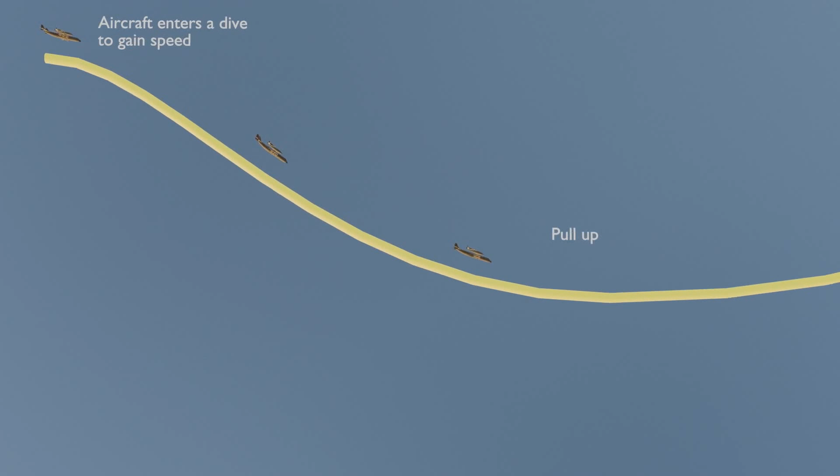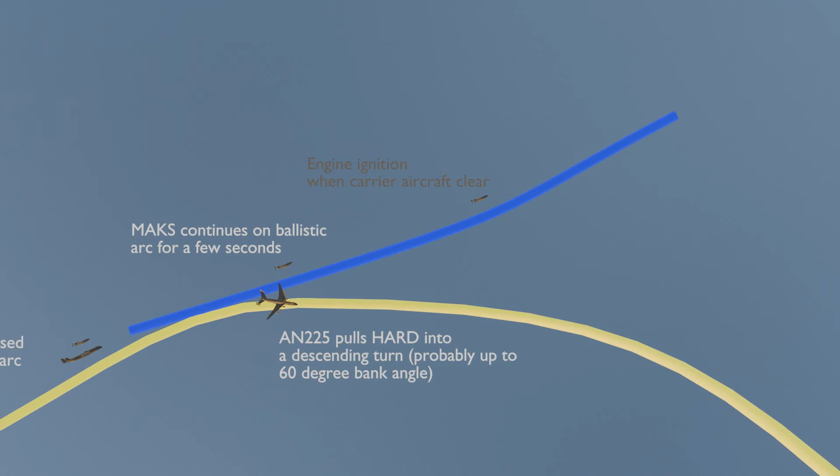This relates to my engine comment from a few minutes ago. To release MAKS prior to firing the engines, the AN-225 would have to perform a pitch-up manoeuvre followed by a hard bank after release. Amongst other requirements, that would require quite the degree of agility in an aircraft near its service ceiling. It was determined the AN-225 could manage this at a maximum altitude of 8.5 kilometres, and that would be cutting things really fine if MAKS were actually to make it to orbit with any payload.

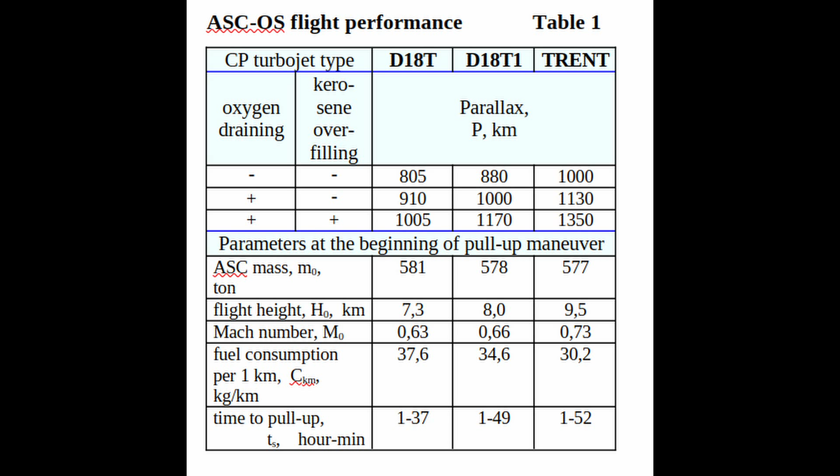The design proposal for MAKS was published in the early 1990s. The AN-225 was designed in the early 1980s. In the intervening 10 years, a slightly uprated version of the D-18T engines was made available. But the proposal document gives preference to building a special version of the AN-225 with Rolls-Royce Trent turbofans. They would allow for a release at 10 kilometres of altitude, easily enough to get to orbit.

It's fascinating that we aren't too far from a present day where Russia, Ukraine, the US, and the UK all work together to completely change spaceflight 20 years before the likes of SpaceX.

The AN-225 had a few other design aspects going for it which I think strengthened the case it would be a feasible launcher. The first was the aerodynamic design. I briefly mentioned in my Buran video that it would be a fallacy to just consider the aircraft as big and dumb. It incorporated multiple technologies which were state-of-the-art at the time. Physical wind tunnel testing was augmented with computational simulation, which was very much an emerging technology for aerodynamic design in the 1980s.

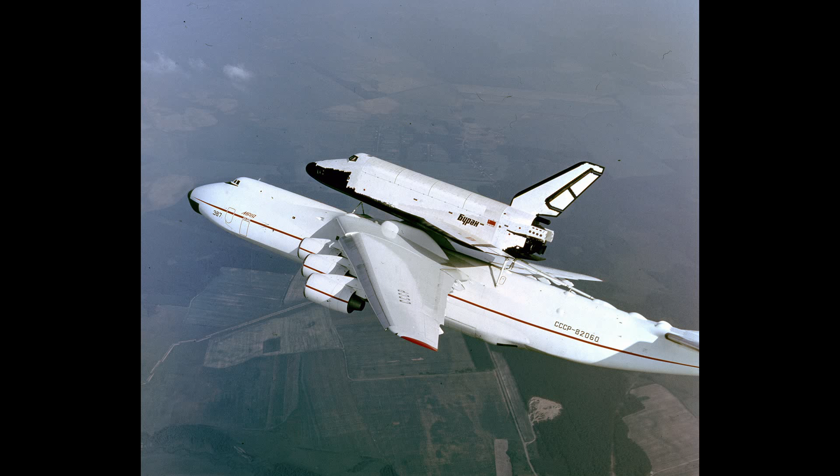The final result was an airframe whose appearance may deceive you. The lift-to-drag ratio of the AN-225 was 19, remarkably high for any large aircraft of its day, never mind a cargo aircraft. For comparison, the Boeing 747-400 has a lift-drag ratio of 15.5. The Airbus A340, which flew 4 years after the AN-225, has a similar ratio, but that has 2 less engines and is a different class of aircraft entirely.

Another consideration is the presence of fly-by-wire, something very new for an aircraft at the time. For carrying outsized loads, some form of augmented stability eventually becomes essential as the size of the load increases and affects the vehicle flight characteristics more and more. The only reason the VMT Atlant was flyable was the addition of a mechanical stability augmentation system.

But the AN-225 had quadruply redundant flight computers controlling the pilot input to all the major flight surfaces. It also had power-by-wire, an electronic link between the pilot's throttle controls and the engines. These additions meant the aircraft would automatically adjust inputs for outsized loads and keep the aircraft flight stable. I can quite confidently say that carrying a 275-ton MAKS orbiter and tank and then suddenly detaching them would be somewhat difficult without a fly-by-wire system.

The final consideration isn't specific to the AN-225 itself, but to air launching in general, and that relates to the actual topic of this video, the engine. At the target launch altitude of 10 kilometers, the air density is only about a quarter of that of sea level. In other words, it's much closer to a vacuum than it is to sea level pressure. A major difficulty in designing, say, the shuttle main engines was building them to operate both at sea level and efficiently in a vacuum. They have large nozzles for vacuum operation, but those required, frankly, a breathtaking amount of design to strengthen them for sea level operation, especially during ignition.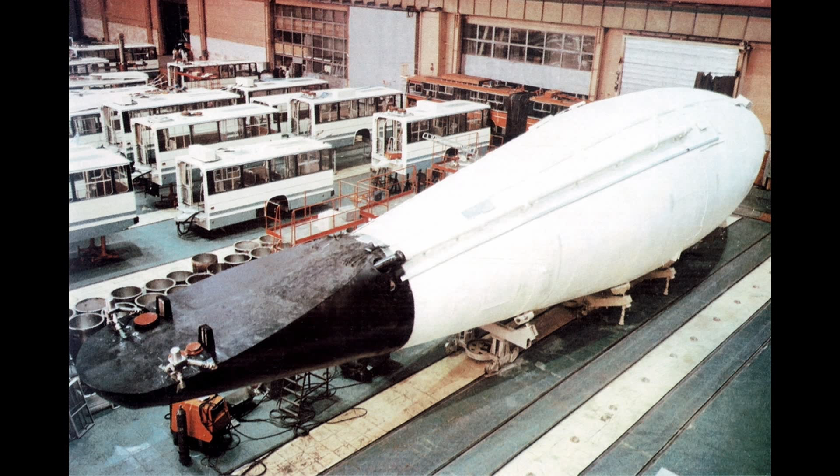With the RD-701 igniting 10 kilometers above sea level, it was essentially operating near or in vacuum for the entire flight. That would have reduced the strengthening needs and brought the mass down, and that, in conjunction with the energy gained from an air launch, a very high chamber pressure, a closed combustion cycle, and optimum choice of propellants, is why this relatively small tank would have been enough to get the orbiter with 2 cosmonauts and 5 tons of payload to low Earth orbit.

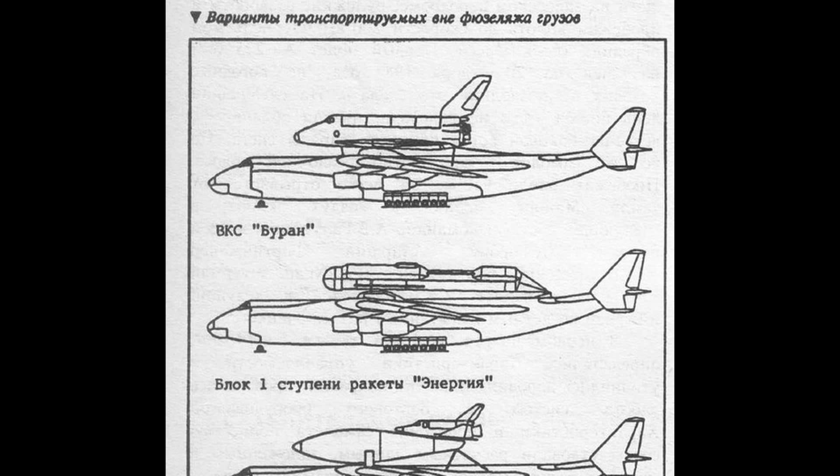So, although I don't have all the information available, and quite frankly the capability to calculate whether the AN-225 would have the necessary strength and power to lift MAKS to its launch altitude, with everything discussed in this chapter considered, I'm confident it would have been able to do so with some semblance of practicality. And if all that failed, Antonov proposed adding 2 extra engines, referred to as the AN-325. Though the Russians in the early 90s generally referred to a basic 6-engined AN-225 with the launch suite as an AN-325, I will leave the rabbit hole of further AN-225 and MAKS derivatives as an exercise for the viewer.

The channel to visit for animations of abandoned launch concepts is Haze Grey Art. They have a brilliant animation of MAKS. One of the top comments in that video says, 'The collapse of the Soviet Union really screwed up space travel for decades.'

I don't really think that's true. I find it disheartening that both Western and Russian governments have effectively turned their back on space exploration during my lifetime, but I don't think the Soviet Union collapsing is the only reason that happened.

By the turn of the 21st century, there were a few promising ideas in the US that were in the advanced stages of design, namely the Rocketdyne XRS-2200, a linear aerospike engine, and the integrated powerhead demonstrator, a full-flow staged combustion engine fueled by hydrogen. Ironically, I think the main reason we never got to see these engines fly is their amazing progenitor, the RS-25, or more specifically, the vehicle it was mounted on.

2 shuttle disasters forced Congress to commit an almost absurd amount of funding to keep the program flying, as they were essentially mandated to do so in order to complete the International Space Station. Now, the ISS has been a resounding success, but back on Earth, and largely in addition thanks to some absolutely wacky politics, 15 years after the last shuttle flight, NASA are forced to fly an extremely expensive derivative of the shuttle.

It doesn't really use any new technologies, and it dumps 4 of those reusable RS-25s into the ocean on every flight. All that said, it is completely unparalleled in payload to orbit capacity at the time of recording.

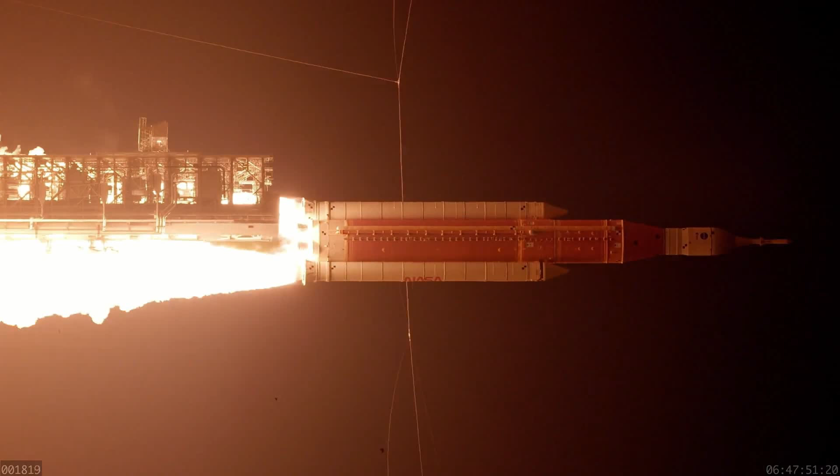Alright, no, listening back, I want to walk that back a little bit. I've made that joke in a previous video as well, and laughing at SLS, if you want to put it that way, is a bit blasé these days, isn't it? SLS is one of 2 rockets ever built that can carry that kind of a payload to low Earth orbit. I suppose 3 if you count Energia, depends how technical you want to get.

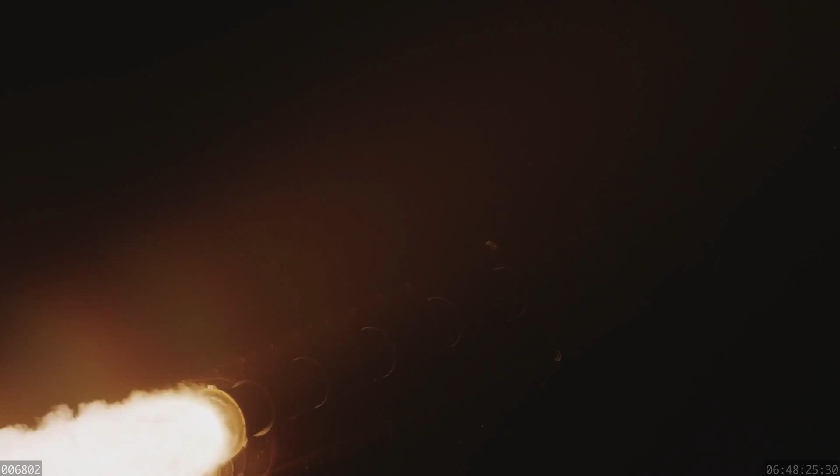The bottom line is, nobody knows how to build such a heavy launch vehicle for anything less than an awful lot of money. I do think it would have been a perfectly fine shuttle derivative if maybe it first flew 10 years ago rather than having a gigantic hiatus, or maybe if it was used for something else rather than trying to land people on the moon.

We'll come back to that in a video next year, probably, hopefully, after it's flown people around the moon.

The Russians, for their part, have also not managed to improve upon the RD-170 and its derivatives. They spent 20 years developing the Angara, which has been mired in controversy and uses the RD-191.

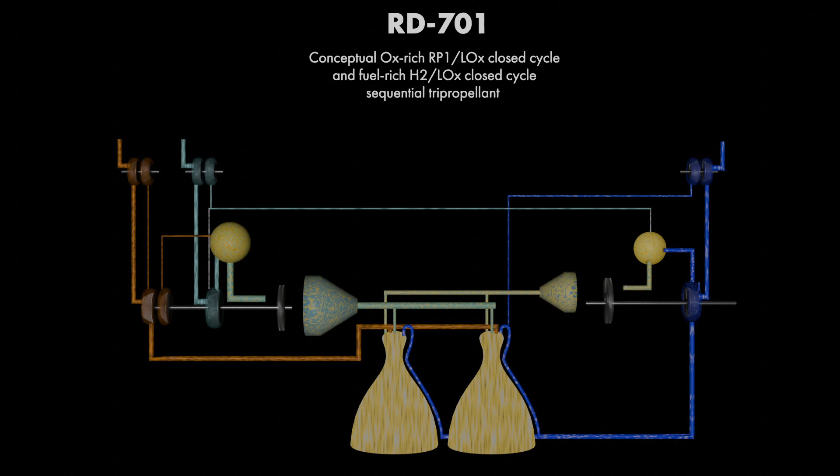But in recent years, there has been a surge in engine development in the US. It's by the private sector. Whether it's a good idea to essentially hand over much of the West's launch capacity to billionaires is an open question. It's one I have no intention of tackling here.

SpaceX famously were the first to fly a full-flow staged combustion engine, the Raptor, mentioned at the start of this video. Its dual shaft design is reminiscent of the RD-701, and it certainly shares some commonality with material choices for the oxidizer-rich side.

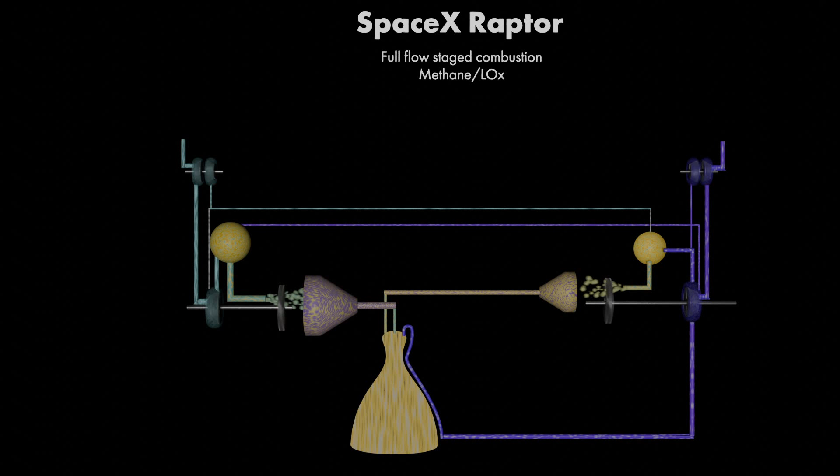Unfortunately, there's a lot of controversy to skirt around when discussing SpaceX at the moment, and I'm not going there. He doesn't deserve my attention.

But some claim they simply copied the integrated powerhead demonstrator and have done nothing new. Even if that was true, which it isn't, all that would represent is both NASA and SpaceX doing their jobs well, NASA taking the first leap and passing the knowledge on to the private sector.

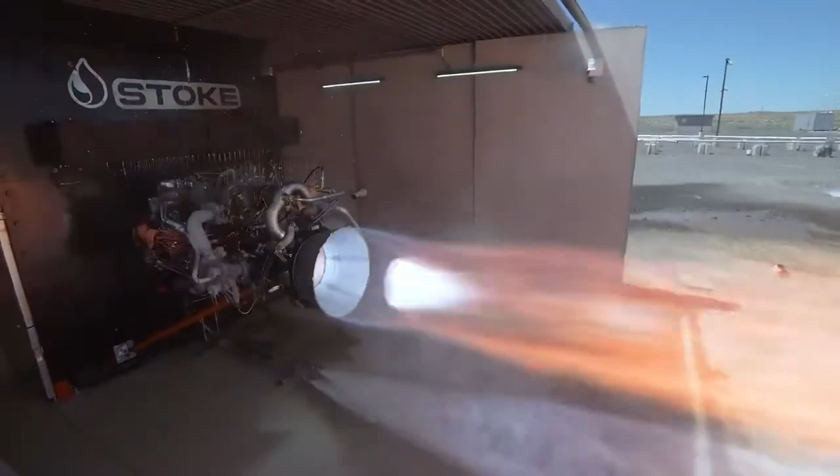All that said, the Raptor is very much in its test phase as I film this video. Time will tell whether SpaceX are able to address the reliability issues. Stoke Space have since developed their own full-flow staged combustion engine. Again, we'll learn whether it's viable over the next few years.

Elsewhere, oxidizer-rich closed-cycle methane engines are very much in favour at the moment. All of these can be thought of as spiritual successors to the RD-180. To be honest, I'm already bored of them. I can only hope someone will dig out the kerosene-hydrogen-oxygen tripropellant plans someday.

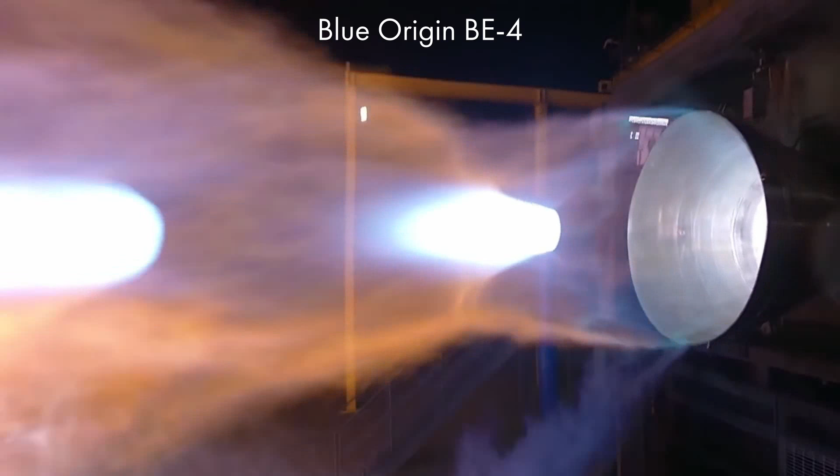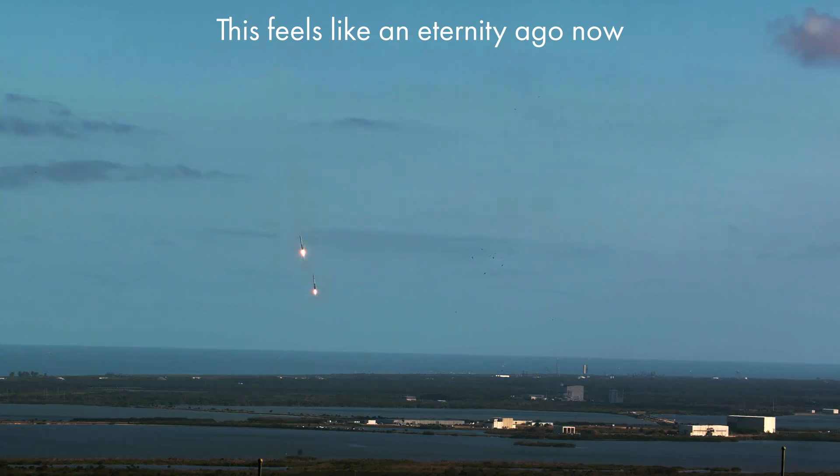That would require another risky first move. But if you run a private company, why take that risk? By most measures I can think of, Falcon 9 is the best launch system developed during my lifetime, and it uses relatively simple open-cycle kerosene engines.

As for air launching as a concept, it's seen limited success but on a much smaller scale than MAKS. The first successful air launcher was technically the F-15, which demonstrated the ASM-135 anti-satellite missile back in the early 1980s. Some claim this was orbit capable, but I have doubts about that. I'm not able to confirm right now.

Recently, Virgin Orbit carried out a few successful satellite launches from a modified Boeing 747 before running out of money. The most successful air launch system to date has been the Pegasus. Launched from a Lockheed TriStar, it's proven itself a reliable, albeit expensive system over its 3 decades of operation.

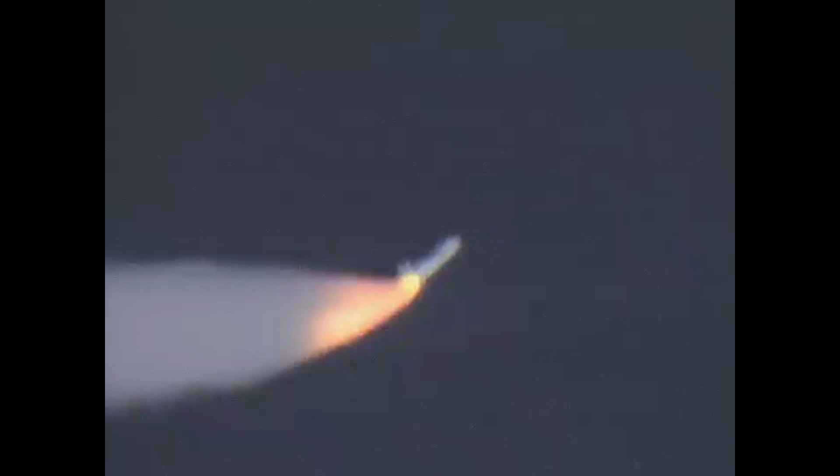Unlike the AN-225, it is absolutely hideous. This would have to work hard to win my heart. As is the running theme here, its parent company have since gone bust and been bought out. But following its initial test flights, the AN-225 had an equally rocky, if not worse, few years. Who knows? Maybe the Roc will eventually go on to do great things. After all, just like the AN-225, it's designed to carry a payload of 250 tons.